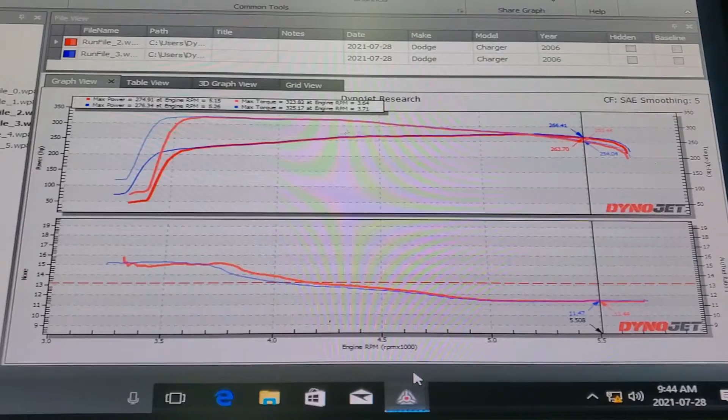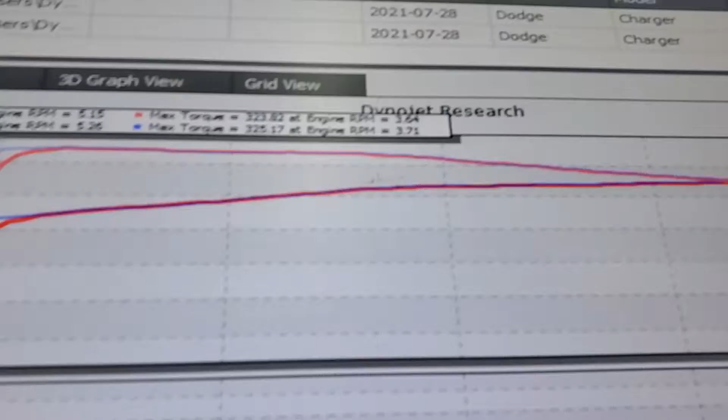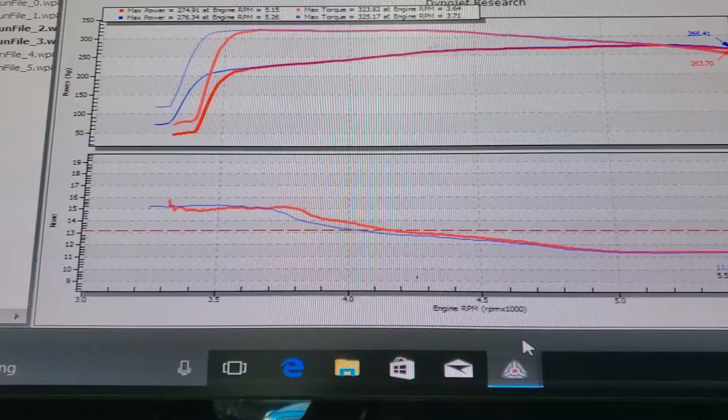Okay, so we just finished our two stock runs. Pretty similar numbers, if you can see it: 275 horse, 325 foot-pounds. We got the AFR graph on the bottom. It's a little lazy to get down to the target there, but that's stock for you. So that's a good baseline, I think.

Now we're going to try a baseline with the Diablo 91 tune before we get to putting on the cold air intakes.

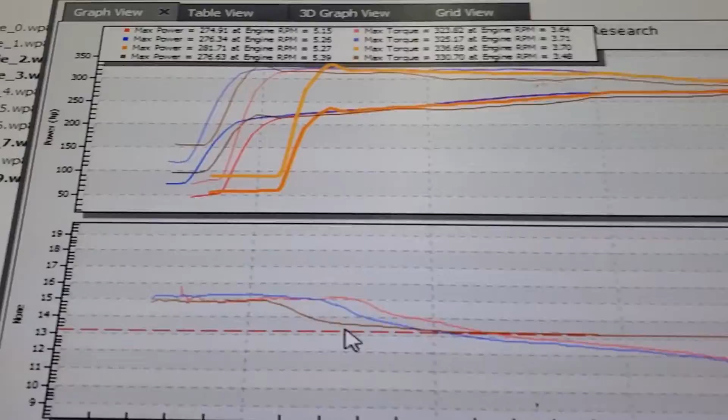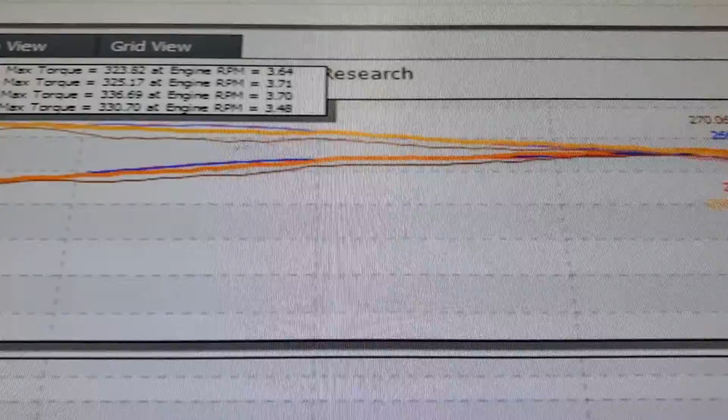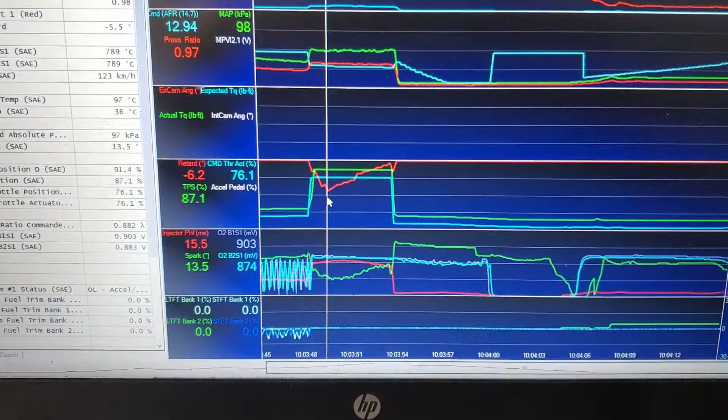Okay, so I just did a couple of runs with the Diablo 91 tune. I'm not really impressed with it so far. I might tweak it a little bit more here. So power, not a lot of difference there: 281 and 276. Torque, we did gain some torque up front, probably a 5 and 10 gain there. The real telltale comes on the data log I did. If you can see the retard there, almost right at tip in, we've got 6 degrees there.

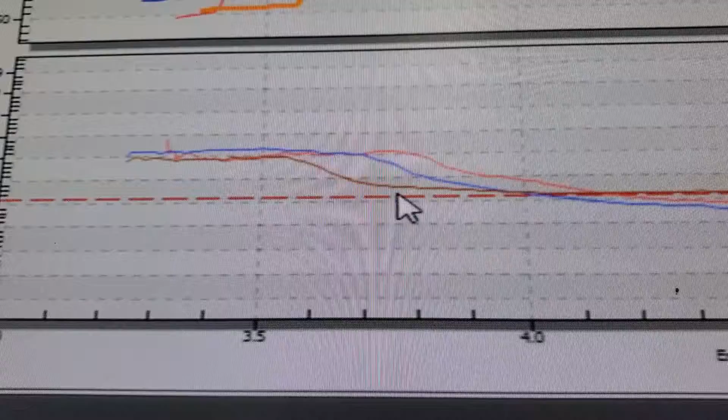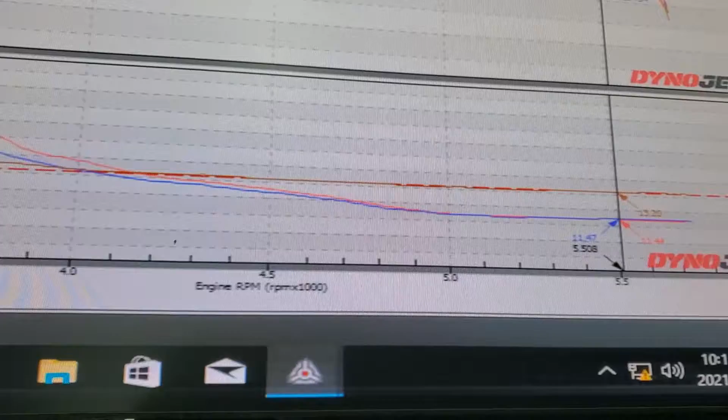So if we look at the fuel, that's the brown one there. I did adjust it a little bit off the hop, and it did bring it down there better than the other two runs, but then it held on to 13 all the way across. So I think if I can get that down, we'll get rid of that retard. I might do a couple more runs with the 91 tune and just play with the fueling a bit before we move on to the cold air intakes.

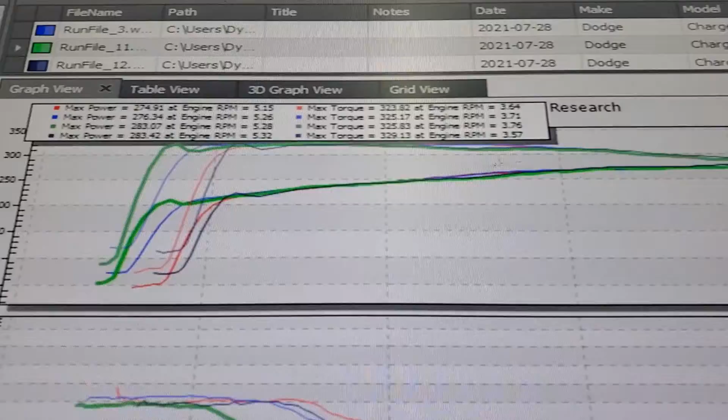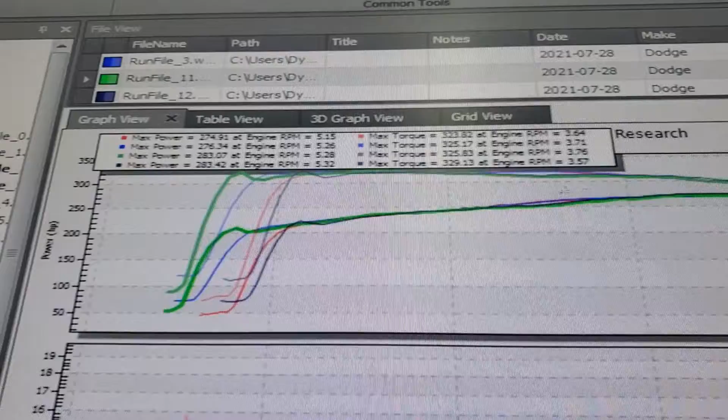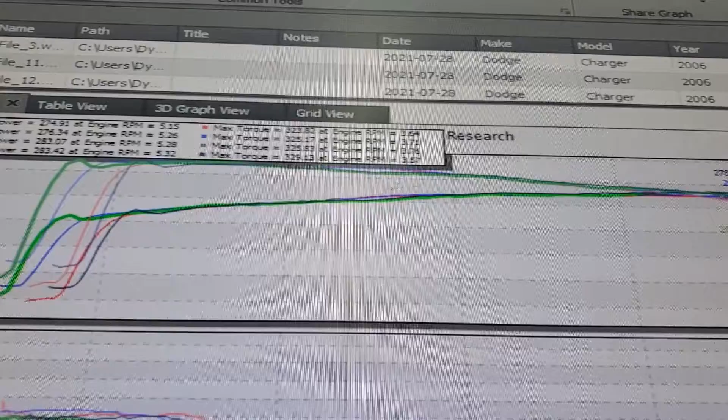Okay guys, so off camera I did a few more tests with the Diablo 91. I played with the fuel a bit, added some more fuel throughout the range. So some final numbers for the 91 baseline: I would say 283 horse, around 330 foot-pounds, so maybe an 8 to 9 horsepower gain and 5 foot-pound, so not a lot. Not overly happy with the fuel. I don't really see any adjustment as far as the quick adjust goes to adjust the ramp-in rate for the power enrichment, so my AFR is still quite high right off a tip in, but I'm not really sure how to deal with that other than just flooding it with fuel.

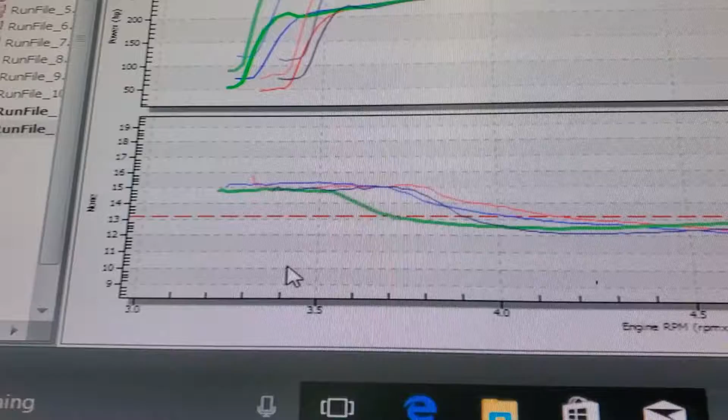So I was able to get it down below. Could go a little lower, but looking at the data log, I didn't have any retard on that run, so I'm happy with that.

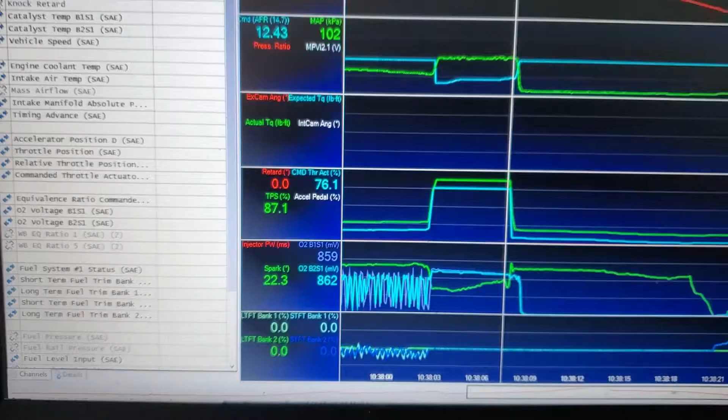All right, so we'll move on to the Flowmaster Delta Force install now.